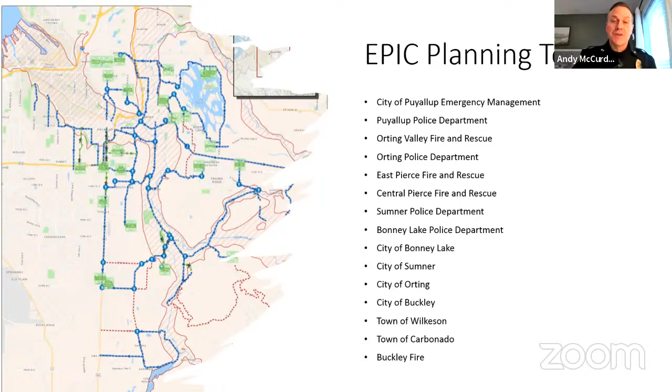So when we talk about emergency management planning, really what we talk about is prevention, mitigation, response, recovery, and preparation. And we look at that emergency management cycle, and it's a continuous cycle.

And as we start to look at what hazards are affecting our community, COVID is an example—that was kind of unanticipated in the specific nature of the threat, but there had been planning in place to deal with a pandemic. But what we learned from that COVID response, when we look at the emergency management cycle, we're going to change a lot of the ways we do things as a result of what we learned during our response.

So we look at this cycle of constant improvement. We're constantly looking at ways to prevent the impacts on local community. We're trying to mitigate the impacts these types of disasters can have. We're constantly looking at how we can prepare the city as well as the community living within our city and working in our city. And part of that has to do with how we plan for government's response and then how we assist the community in recovering after an event.

Now, this emergency management cycle can be for small events, like we have frequent flooding in the Sumner Valley, and we will go through this emergency management cycle in response to even small flooding. But it's also something we would use to prepare for catastrophic events like a lahar from Mount Rainier.

Now, the preparedness part of that cycle, typically what we look at is the planning, organizing equipment in our communities, training, conducting exercises, and then we constantly evaluate to improve how we respond. So this preparedness cycle is constantly going, and as new threats are identified or new tools are purchased, we constantly want to train and plan and exercise how we're going to use those so that during a real event, we're prepared and not caught flat-footed when something actually happens.

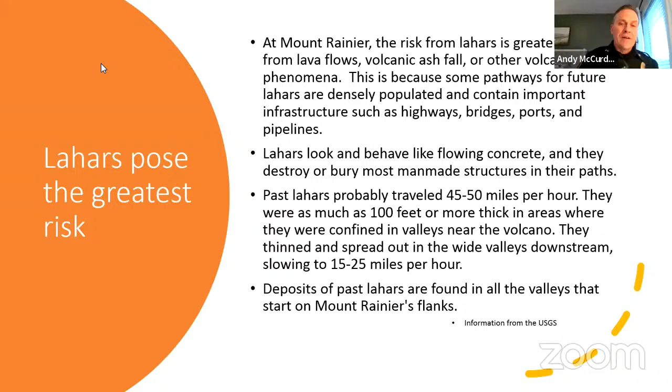One of the things we've done to plan for the eventuality of a Lahar is what we call the East Pierce County Lahar Rapid Action Plan, or RAP. This has been a big body of work accomplished by the EPIC team. Each community has its own unique RAP plan that meets the needs of its own community.

It's designed to give first responders directions so they know what to do to try to mitigate the impacts of the Lahar as it comes through. Typically during this no notice or short notice event, they would refer to that guide, then go to predetermined locations where they would start to direct traffic out of the danger area into safer areas. Typically most of the city of Sumner is going to evacuate into the Bonney Lake area.

Bonney Lake has to be ready to receive us. It's pretty massive if you think about the entire population of Sumner. You have to also consider the businesses and commercial areas, and so on. The light industrial areas in downtown Sumner would all have to evacuate.

I personally have been involved in a major natural disaster back when I was a police explorer down in the Bay Area. I was working during the Loma Prieta earthquake when the bridges collapsed. Just to give you an idea of what it looked like, I was at an intersection in the city of Hayward, a pretty good distance from where the bridges collapsed. I was standing in the middle of that intersection for about 12 hours, and during that time not a single vehicle moved. It was complete gridlock in the whole region.

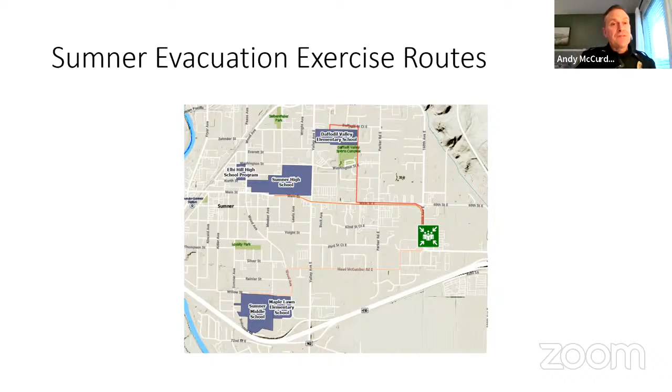As I mentioned before, this whole project is being done by the EPIC team. There's a website for EPIC at www.epiceoc.com, which stands for epicemergencyoperationcenter.com. I'd encourage you to go to the website and take a look. There's a really interesting presentation on there about the cold storage fire in the city of Puyallup last year, with a lot of descriptions of what happened and some photos. It's a great example of the amazing amount of work that gets done during a major catastrophic event like that. I'd encourage you to go check it out.

During a real event, you'll see on that website that there are maps posted, and those maps are kept up to date by our personnel in the Emergency Operations Center.

So as an example, they would be using those maps to show people where it's safe to evacuate to. We also recently purchased something called Code Red, a public notification system similar to PC Alert, but it's something we have a little more local control over. Typically during a major event, somebody in the Emergency Operations Center, police department, or fire department would send a message out through Code Red to notify the public about emergent actions they need to take because of a public safety hazard.

Here's what that looks like. If you go to that EPIC EOC, here's a picture of that map that actually shows the evacuation routes for Lahar. The whole Lahar evacuation route program is coordinated regionally. Each of the first responders needs to know exactly where they need to go.

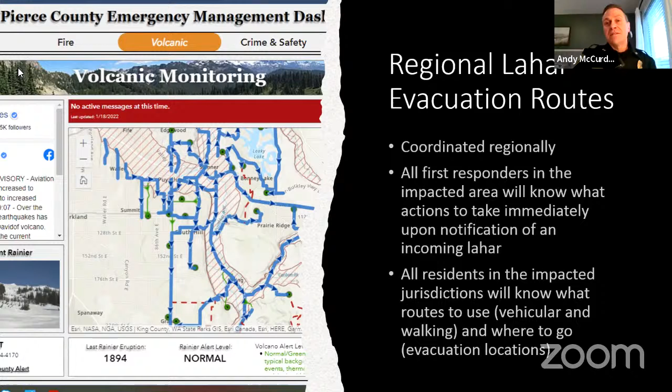So basically, especially in the city of Sumner, all residents are going to be impacted and need to know what routes to use. It's most likely that most people are going to have to evacuate by foot, which means that as a community, we're all going to have to come together to take care of each other, because some people are not going to be able to walk out and are going to need other people to help them do so.

Also on the EPIC EOC website, there's a lot of information about preparation, how to create a disaster plan for yourself or your business, some information about how to plan for your family, and some things you should have for your go bag in case there is an event.

I think the Lahar hazard, even though it's something that's unlikely to occur in our lifetimes, it is still significant enough and is going to happen again at some point. So a little bit of preparation before the real event happens is going to make it a lot less stressful for you and your family.

And that's most of my presentation. As I said, Kirsten's on the call as well. I don't know if she has anything else to add that I missed, or if anybody has any questions.

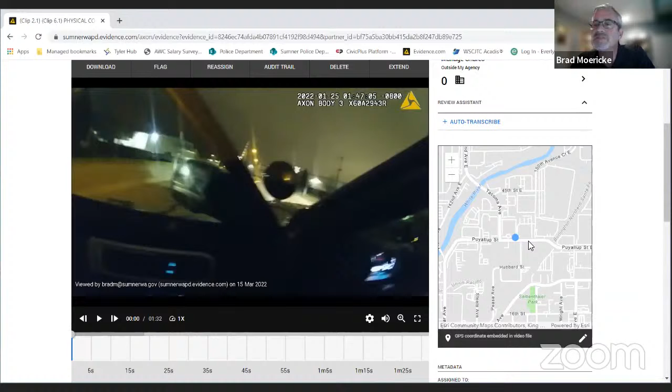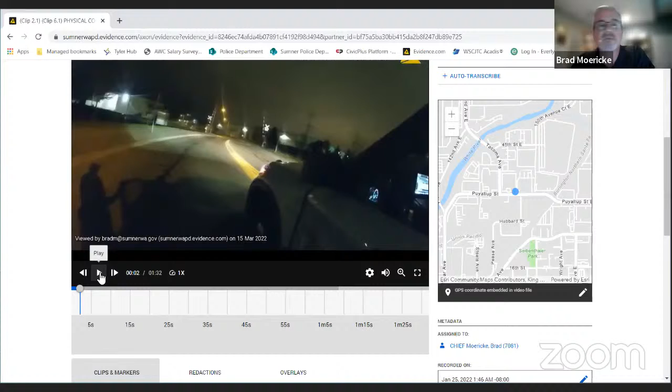And that's why I wanted to share this one with you. It's not redacted, it's an adult, he's not in a private location, and he's been charged with a crime. You'll notice the body-worn cameras are GPS enabled, showing the location of the incident. This was in the middle of the street on Puyallup Street. A motorist called in, a subject apparently passed out behind the wheel. That car in the back is the reporting party, who stayed there till police arrived.

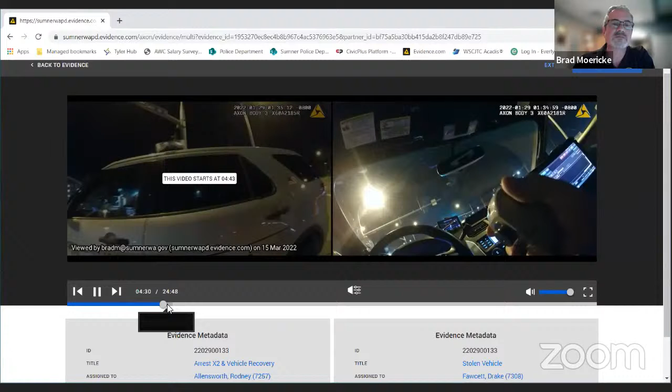Put your hands up, right now! Keep them where I can see them! Kind of went there, it was a challenging one, compliant so far. Very calm, letting dispatch know everything that they're doing. Northbound, south side of the building. And backup's arriving, you want to pull them out on the driver's side?

We got him, Trout. We're gonna start calling him out. We'll call him out on my right side of my car. You wanna hold there? All right, I'm gonna call him back. You ready, boss? Yep, all right.

I don't know what they're doing. We're gonna call him out. Driver, open the door. Take both hands up in the air. You're being audio and video recorded. You're in a stolen vehicle. Step out.

Put the car in park. Face away from me. Keep your hands straight up in the air. Take 4 steps straight up in the air. Take 4 steps to the right. 1, 2, 3, 4. Walk back towards the sound of my voice. Do it now.

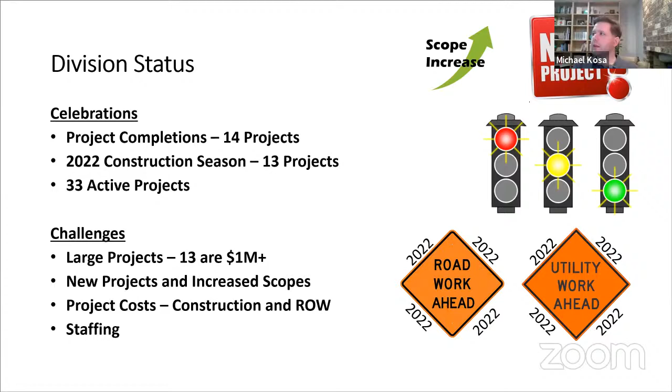So a quick overview of our staffing status. I'm the city engineer, and I have a few projects on this list. But aside from that, we really have just a couple folks that are running these projects.

Andrew Leach is doing transportation and sidewalk focused projects. We had Jason Van Gilder on staff until the end of last year. He left, and he's now a public works director in Idaho. Good luck to him. But we are currently actively looking for a backfill for his position, and that's really a utilities focus, water, sewer, storm focus, everything to do with pipes.

We also wanted to say hello to our new associate city engineer, Alisa Ayala. She started in January, and her focus is that she comes from a construction background. So she's being utilized for a lot of our construction projects coming up, and also special projects. She's worked on facilities before, so she has a varied background that is not solely underground or transportation focused.

And we also have Robert Wright on staff. He's much more environmental and sustainability focused. He works with our NPDES permit, our stormwater permits, and he's also helping on the White River project and some of our storm projects.

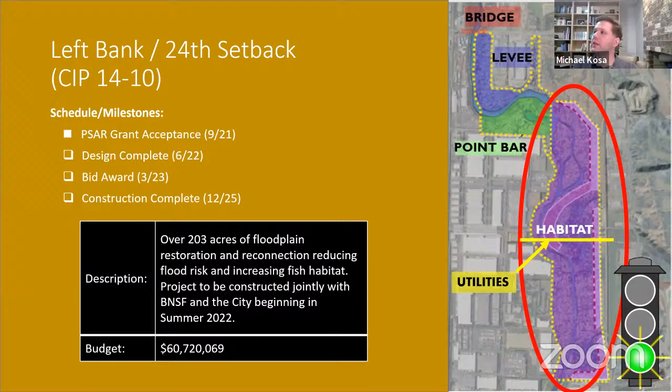And right now we are all systems go on that, just waiting for that Corps permit to get through the process. Feel free to stop me at any time if you have any questions, but I'll just keep rolling.

24th Street utility relocations, that was the yellow line in the middle of the last slide. That's going out to bid this year. It's some water and sewer line relocations, including a sewer pump station, which is what the picture shows. That's being relocated so it's out of the purple area. That's about $4 million, looking to complete that sometime next year.

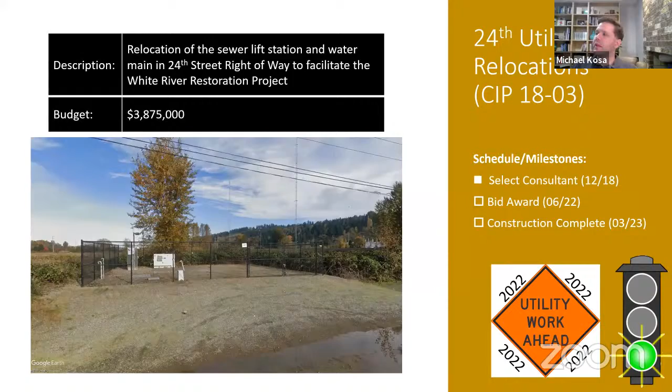That was also a green light. Our other project, the Pacific Point Bar and Stewart setback project, it's a little further out, but it's also in line to be completed. We're looking at property acquisitions right now, and looking at about 2024 to complete those property acquisitions.

It's just a little bit slower than the other project. We have all of the property for that purple area, whereas for this, the blue and the green area, we're still looking to finish our acquisitions, and that's those parcels in red. Once we can get those acquired, then we'll be able to move forward. Really our focus is trying to get that purple area under construction. It'd be a great achievement.

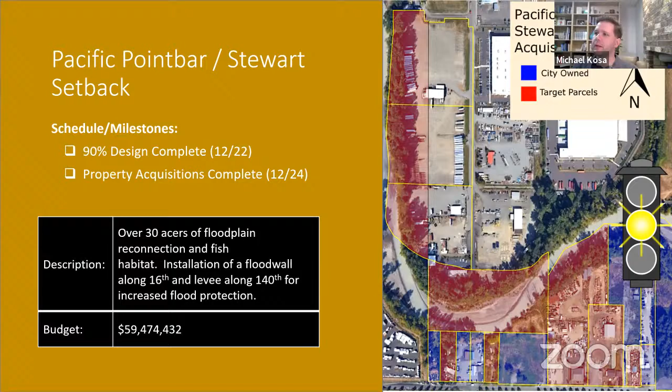And then we also have, at the beginning, the Stewart Road Bridge project, which is currently going through final design.

It expands Stewart Road from the 2-lane bridge that it is today to a 4-lane structure. It also has a shared use path on it. It's the last piece of the corridor between 167 and Lakeland Hills, so everything else is 4-lane except for this one. Unfortunately, it's the most expensive one because it is a bridge.

We've been really focused on acquiring grants for this project. We have about 50% of it funded through grants, but we're still trying to acquire grants for the construction phase. Right now the project is slated to begin in 2023 or 2024, hopefully with some more funding. It's about a 3 to 4 year project because of the work that has to be done in the water, and there are fish windows involved at certain times of the year when you can get in there and do work with minimal disruption to the endangered fish in the river. So that one is currently green light.

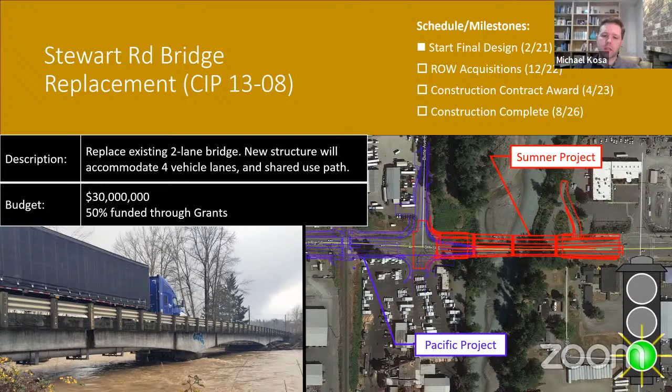The Pacific project is currently going on right now. That's the area in purple. They should be completing that by the end of this year, possibly running into next year a little bit. We'll see how that goes. So that's the White River restoration projects.

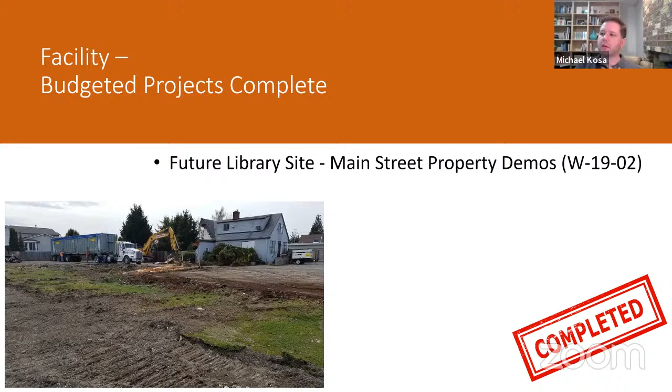Next, I'm going to move to facility projects. The one we have completed was the future library site at the Main Street property, demos of the property that was transferred to the Pierce County library system. We did some work on getting that property demoed. That was one of our projects.

We have the operations facility. This project has been well discussed, and we are almost at a fully completed design. We're looking at completed plans for review. They're very close, within a couple months of having a final design package, but we also have property acquisition issues, so that's slowed us down. We're kind of at that yellow light phase. We also had a scope increase. Originally we hadn't anticipated it to be as large of a project, and it just grew a little bit. So those are some of the headwinds we face as we're looking at these projects, trying to figure out how we're going to complete them.

We've gone back to the drawing board a little bit on this project a couple times—not to the beginning, but retooling things and making sure we get it right, because it's a large amount of funds to spend, and it's our long-term facility.

So, Councilmember Stuart. Yeah, thank you.

Can you put your cursor on the two properties on the north of 29th Street that we're trying to acquire? Yes, those are these right here. And that's two parcels there, is that right? Yes, I believe the Buck parcel is this one on the right, and I believe that is under a purchase and sale agreement now, or about to be. I think the paperwork is in the queue if not. And then the Cabrera parcel is this one here. So the one to the right on that picture, just to the right of that cursor—is that going to stay there? We're not acquiring that? So this here is the Buck parcel, and then there's like a little subdivision of maybe 2 or 3 homes, probably a little short plat. We're not acquiring that; those are going to stay. Okay, great, thank you.

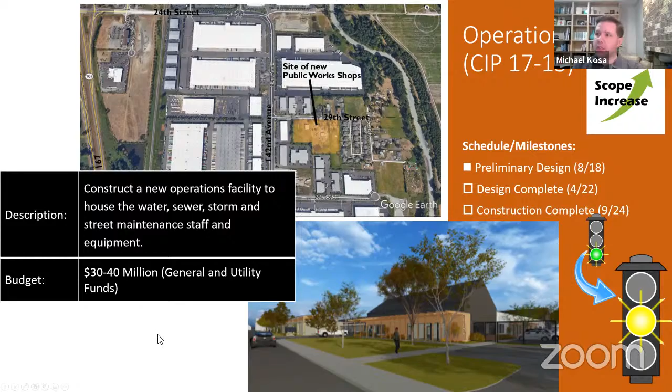That's the operations facility. Next, we're going to talk briefly about Rainier View Covered Court. This project is a new project from the budget process perspective, at least. It's a project we've been looking to get completed for a while, but the funding came in last year, and we are currently in design. The design is slated to be complete at the end of this year, with construction complete in 2023 at Rainier View Park.

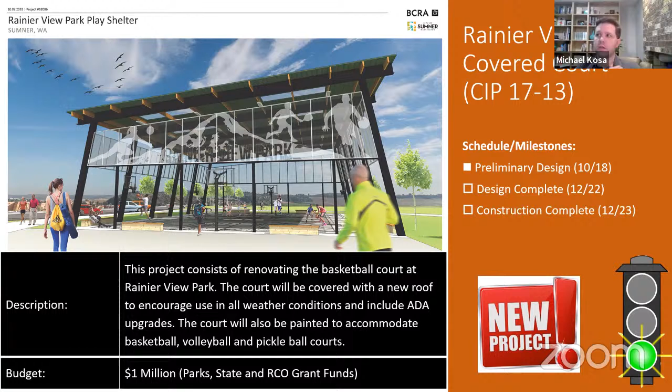Another facility item that we have is the Heritage Park remediation. This part of Heritage Park was a former Texaco site and had some underground storage tanks. You may have heard some of this in one of the committee meetings, but back in the 90s there was some work and investigation done, and then in the early 2010s some more investigation was done. There was some contamination found, but there wasn't really a comprehensive look at that. Now, with the amount of work being programmed at Heritage Park, it's the right time to look at that site and make sure it's cleaned up, and see what sort of actions need to be taken if needed. So we're working through that, and we'll be selecting a consultant to start looking at that work.

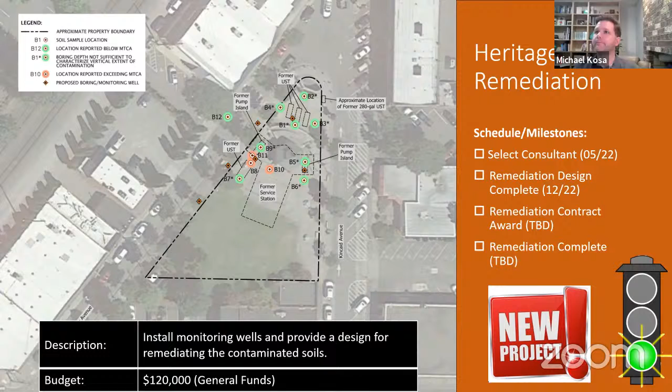And we're on target for that. Next, I was going to launch into roadway projects, and thank you for allowing us to switch up this project presentation and the 6-year TIP presentation. You might see a few of these projects on this presentation, and maybe we'll answer some of your questions for that TIP presentation that Andrew Leach will be giving.

But first off, some completed projects. We've got some big ones: Bridge Street Bridge, 410 Cannery Way Bridge, the 410 Traffic Avenue interchange bridge. We are just finishing up the sidewalk improvements in town. That project is substantially complete, and they're just finishing up the last pay estimates for it. And then we also completed the 142nd Avenue intersection study early last year. So those are some completed projects.

Councilmember: I noticed on the 410 Traffic Avenue interchange that there's damage on the wall, like that railing at the top. Who's responsible for that? Is that the city or is that the state? Staff: We are currently working through that exact question with the state. We've recognized that, and we're trying to determine whose maintenance responsibility that is. We'll figure it out and get it done, but it's a discussion topic.

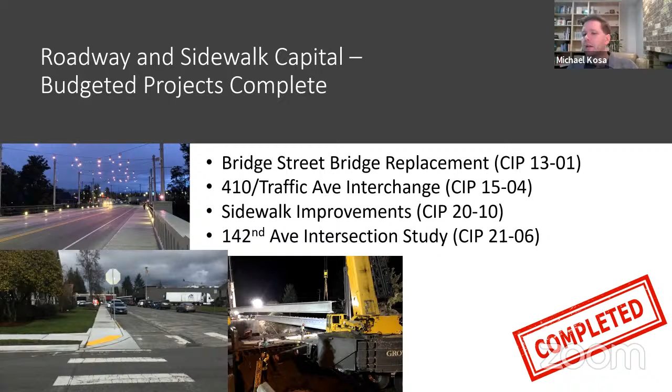Yeah, it's a plant establishment period for most of them. The last thing that happens is the landscaper comes in and plants the plants, and then they have a warranty on those plants. So that extends the length of everything one to two years, which is unfortunate from a paperwork perspective, but good so that we make sure we get what we paid for and don't end up with a bunch of dead plants along the way. So anyway, moving on.

First project we'll be talking about is the Alder and Kincaid Utility Improvements Project. You've seen a lot about this lately. It's out of the Main Street visioning, and really you can see it's the development of the Cherry and Kincaid streets into the Woonerf configuration, as well as the intersection at Main Street. That's the nice picture on the bottom. The really nice picture on the upper left is all of the water lines that we're going to be working on, which is where Public Works gets a lot more excited. We love plazas too, but upgrading water lines is what this project started out as.

And I probably should have had that scope creep icon on here too, because this is one of those projects that just ballooned and ballooned. Before you knew it, it was much larger than when we started. However, we are doing a lot of great things with that. It's a scope increase of all the water line work, and then realizing that if we don't do something with the pavement that we're digging up to put in our water lines—well, this is why we want to make a nice plaza area for the future build-out of Heritage Park and future improvements.

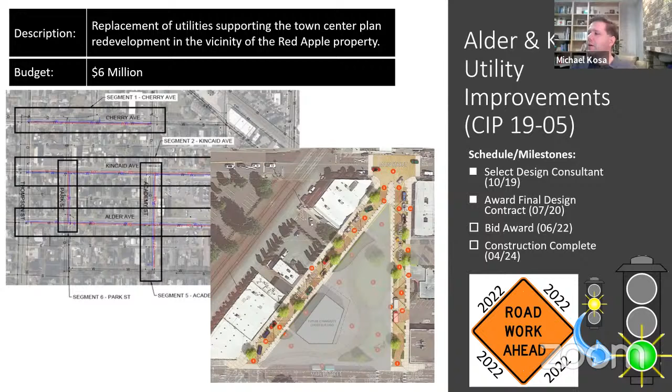It's really exciting that we were able to pair these projects. We can save some funds, and we're looking to put that out to bid next month. So it's a large project coming out. Originally we were a little concerned about how the funding would all come together, but now that's become clear, so we're all systems go on that project.

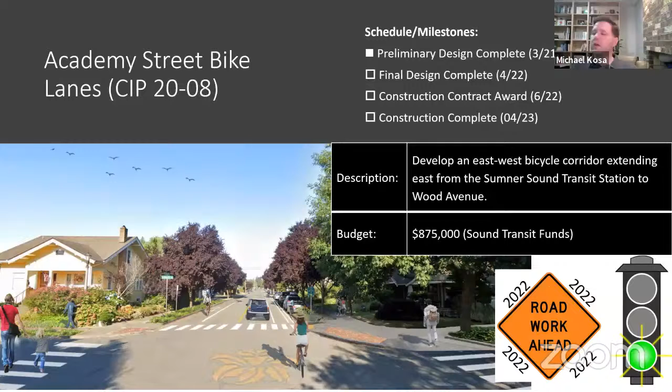Additionally, there's the Academy Street Bike Lanes project. These two projects are actually going to be bid as one bid package, which should be a cost savings and takes care of a lot of overlap between them—water lines on Academy, bike lanes on Academy. It made a lot of sense to have one contractor doing all of that efficiently, restoring the pavement once instead of twice. So, same track, we're planning on having construction contract award in the June timeframe, and likely both projects will be getting going in early July.

Next project is the 166th Avenue East widening. This is our double roundabout out at 166th and Sumner-Tapps Highway at the 410 on and off ramp, also a project you've heard a lot about. Some great news on this project was we received about $1.3 million in federal funds for the final design. We're working through that final design right now, which slowed things down a bit to get all the federal funding paperwork in order.

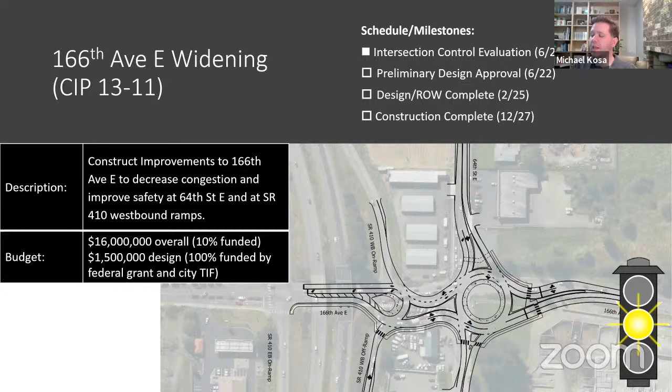The good news is it's a project that's going to take a little while. We have that culvert underneath the intersection—that's a fish-bearing stream at Salmon Creek—and we're in the preliminary design for that large culvert, which is going to replace a 36-inch pipe with a 20-foot wide culvert. There's a lot of interested players, a lot of regulation and permitting involved. But that's the only reason it's slow—it's getting through the environmental permitting process.

Next up is our Main Street and Wood Avenue intersection improvements. This one is planned to go to construction this year—probably looking at complete construction in '22, but it will likely be spring of '23. I have it marked yellow only because there are still a few property acquisition question marks out there, which is one reason it's probably going to slip into that timeframe. It's always challenging to get all of your right of way secured. Additionally, we keep looking for additional funding, federal funds that could help. While we've budgeted for the entirety of the project, we're always looking for ways to fund projects without using as many city dollars, so we'll continue to do that.

This is an older graphic—it's changed and morphed a little bit since then. But the parking is actually replacing parking that exists today out there at the Dairy Freeze and the bike shop. All of that parking is going to be replaced with the parking you see here, which is why it looks like there's so much parking. Actually there are fewer spots than before—some spots are really close to the intersection right now and can't remain where they are. So we found every possible legal parking spot we could get in here to try to accommodate the neighboring businesses, and that's part of why the acquisition was needed—to get this parking in.

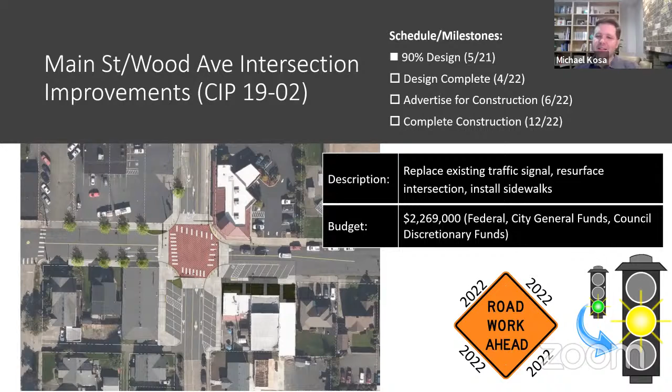Another project that's almost made the completed list is the Sumner-Tapps Highway Guardrail Upgrade and Repaving project. I have the picture on the cover of the repaved area, but we've been working on a guardrail project on Sumner-Tapps Highway funded by federal funds, and that's wrapping up in the next two weeks or so. Peterson Brothers was our contractor for that and has been working on it diligently, and is almost done with replacing all that guardrail—a great safety upgrade to the road utilizing federal funds.

Councilmember Cole said: Yes, so I'm curious—we did get an email about the slow traffic there.

Is it because of the construction of the guardrails? So it's not, and it's been an issue that has kind of been consistent after we did the repaving project.

During the repaving project, we reconfigured Sumner-Tapps Highway. Originally it was a 3-lane roadway section, a hill climb lane, with 2 lanes going up the hill and 1 lane going down. When we looked at the repaving of that roadway, since we were repaving the whole thing, it was really the time to look at striping and how we've striped the lanes out there, and also safety.

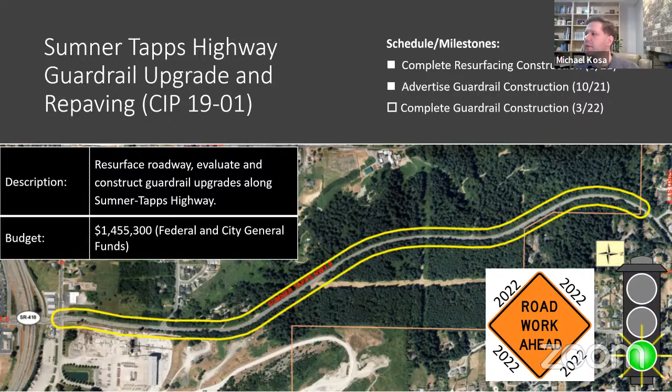Great, thank you. And that'll be completed in the next, like I said, 2 to 4 weeks probably. We'll start getting into substantial completion and punch list items.

Next up is our 160th Retrofit and Pervious Sidewalks. This is the sidewalk between Main Street and the YMCA on 160th. This project has been a slow project. We've had funding through the Department of Ecology for this project, which was great, but we've had to meet all of their requirements, and it's been a bit onerous to get through the process. So it slowed us down quite a bit in getting this sidewalk in.

However, it's out to bid right now, so we're really excited that that's off and will be constructed over the summer. So that is back to a green light project.

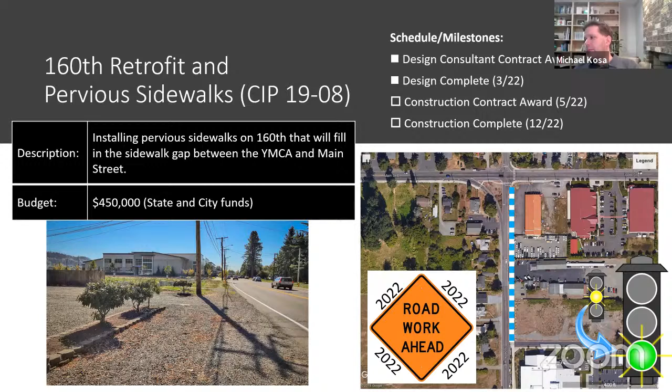Next up is our Rivergrove pedestrian bridge. We have been looking at this. We have funding from Sound Transit for the design of this project, and this has been advancing. We've done our preliminary design, and that's been reviewed and is being approved by WashDOT now to move into final design.

That's kind of slowed down the process, as well as more geotechnical boring data that we would like to get, and that takes a while, and trying to figure out the funding picture, how we accomplish all of the drilling that needs to happen. So it's a little bit delayed, but still generally on track. We don't have any funding for the actual construction of the project.

Councilmember Cole: And so I'm wondering, because you don't have funding, I see that it does have a yellow light, but does that mean that the schedule that you have laid out here is still sort of a viable schedule? It's a viable schedule, presuming that funding shows up.

Okay. And a lot of times when we are completing projects, we are advancing projects through design, and sometimes we get funding from federal sources. Some of these sources that we are able to apply for grants for are accepting applications a couple years out. For example, we're about to start applying for grants through our federal STP program, and there are 2025 and 2026 cycles.

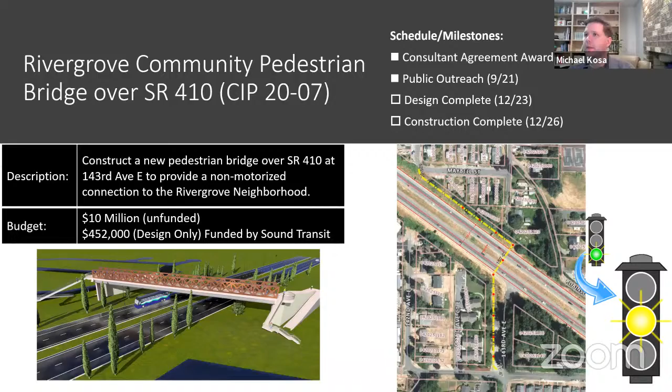Next up is Fryar Avenue Trail. This project is currently in design and in environmental permitting. It's a little touchy from an environmental permitting perspective because it's right along the White River, so it becomes a little more of an issue, but shouldn't be too much of an environmental issue. We're working through it right now.

We also have funding for the right-of-way phase, some strip acquisitions, and then I think one property purchase for this Fryar Avenue Trail. They'll be going underneath the Cannery Way Bridge ultimately, but those funds will be coming open in 2023, so that's why this one's slated for then. But the project will continue moving forward, and we're looking at trying to acquire more funding for construction for the project. We're thinking that would probably be 2025 if we were able to get some grant funding. We'll be applying for it, and fingers crossed.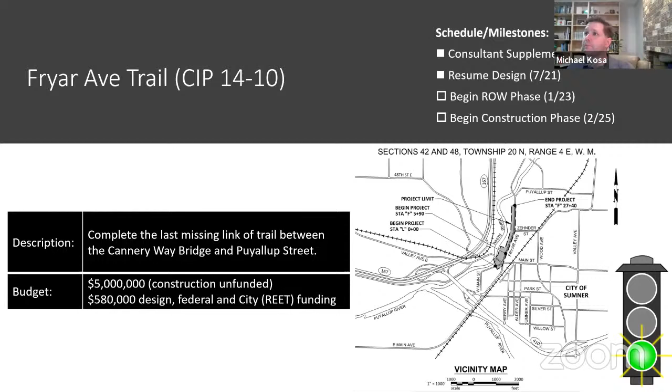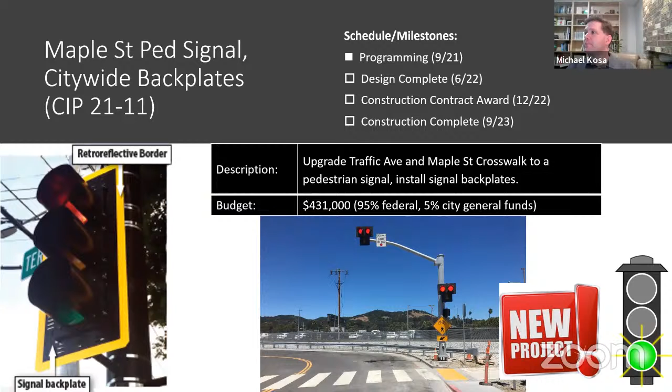Pretty quick design, but looking at getting it completed next year. We also, as part of that project, will be looking at our signal backplates throughout the city, shown on the left. Each traffic signal head has a backplate and a retroreflective border around it - some do have them, some don't. But they really are of a safety benefit to have that border, especially if we have a power outage and a signal is completely out and dark, whether it's a car crash that hit the traffic controller or whatever. If it's dark, people miss that it's even a signal there, especially at night. So these retroreflective borders really help in those instances, as well as draw more attention to traffic signals in general. So that project's on schedule for next year.

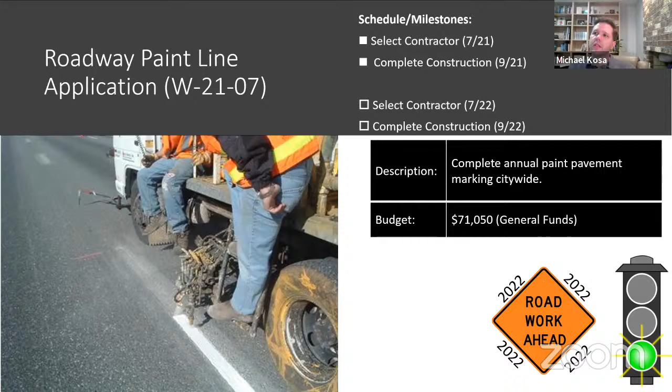Construction - now we get into some of our roadway preservation projects. These are in the budget, but I'll just go through them quickly as a list. Yearly we do a new paint line application for our Sumner roads. That one is scheduled for this summer, usually July, August timeframe. We'll also be looking at a crack seal project.

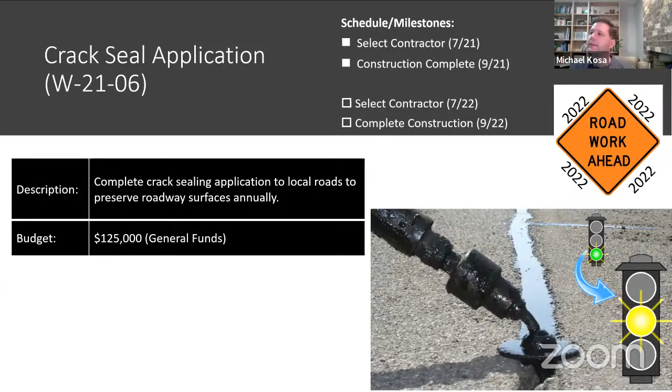It's been a little bit slowed this year, which is why we had the yellow light, but that's primarily just trying to, with all the different projects we have going, really wanting to make sure we get those big projects out and bid in the next couple of months so we can get started on them as well. So this one's lagging a little bit because of that, but still scheduled for July.

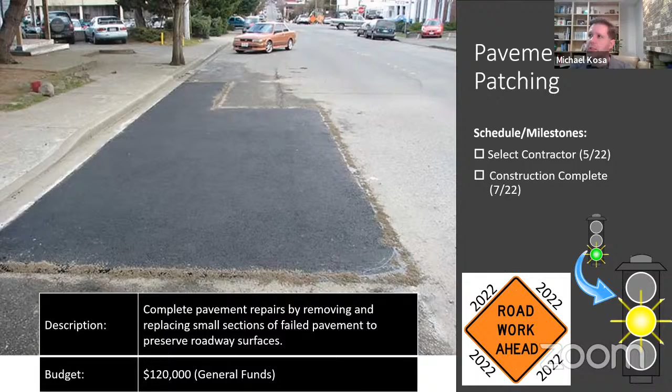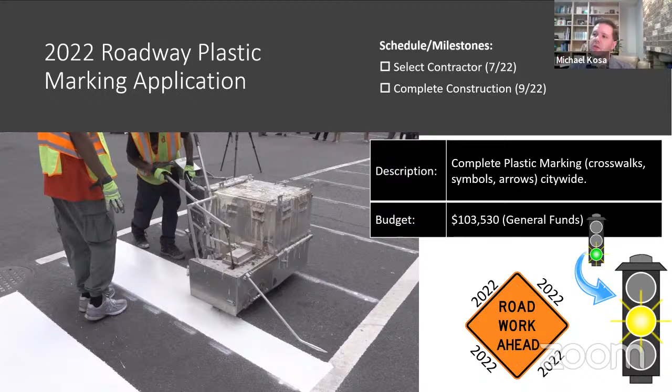And then another traffic maintenance item is our plastic markings, our crosswalks. We have a program to complete all of those, to complete a cycle of those, we replace them every 7 years. So every 2 years we have a project that goes out and completes another portion of the city.

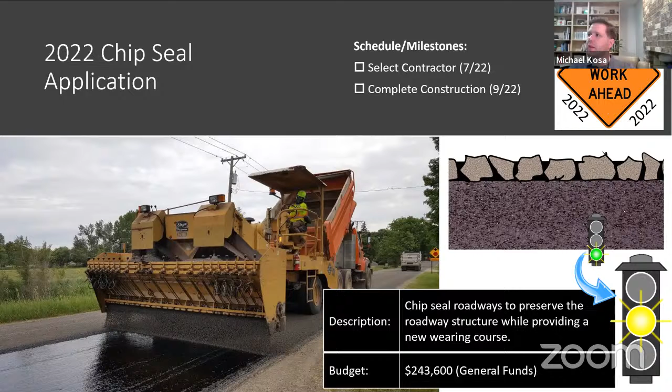This is the existing roadway surface. They put the little rocks on and they stick down, and then they come back and coat those rocks to make sure that they don't pop up. First couple days, we usually get complaints about rocks popping up, sometimes that's before they put that final coat of oil on top of it. This is also in line to get completed this summer.

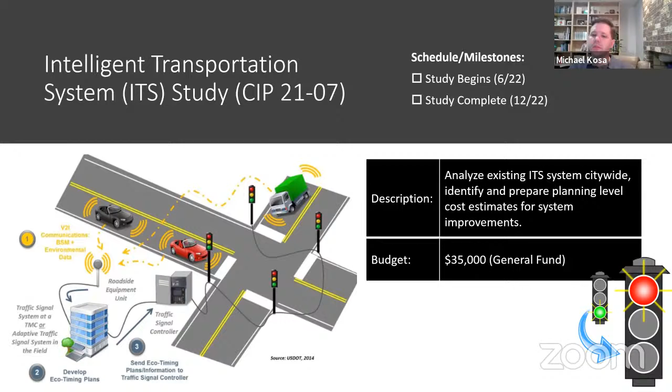One of our projects that we've kind of paused on was our ITS study. I know we've done a fiber study in the city recently, but we haven't done a specific study for traffic signals, and that's in the budget. It's just been really difficult to balance everything, and with the staffing issues we've had, it's a challenge to start this when we know it's a little more optional than many of the other tasks we have.

Next, water projects. One thing that's a little misleading, I talk about water, sewer, and storm projects. Some of those projects we've already talked about involve a lot of funding from water, sewer, and storm. That Woonerf project that we're building a plaza on has somewhere around over $3 million of water funds in it. It has some sewer funds in and quite a bit of storm funds as well, upwards of $1 million.

So these are more specific water, sewer, storm projects coming up, but a lot of the funds are used in that project, in the White River project. That utilities project running underneath the White River project was about $3.8 million, and that's water and sewer funds. So it's not specific to one place, it runs into a lot of different locations, but these are the more water specific ones, and you'll see some of the impacts of not having our staffing in this.

We've had a few projects that we've got on hold until we get through the big push of getting our other construction projects out for the year. We did complete 3 projects in the water utility, including our Viewpoint booster pump station - that's emergency power there, you can see that lower picture. We also completed our south tank drain line repair; this was our drain line that burnt in the fire and was replaced. And then we also completed a large water main project on Hubbard Street that is adjacent to the Duke Realty site, the new warehouse at Tacoma and Puyallup Avenue.

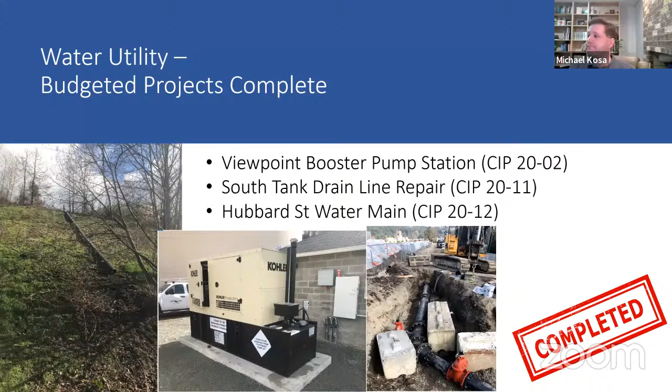A couple of these projects that we're looking at, one is our South Tank Seismic Retrofit. That's essentially switching out some of our valves on the South Tank to incorporate seismic valves that will resist seismic activity in the event of an earthquake. The budget there was 2.4, but that'll come down because originally we were talking about having to bolt the entire tank down. After doing an engineering study on it, it was determined that we don't need to do all of the bolt down procedure, so that'll bring the cost of that project down, and also just the scope in general. We'll also end up painting the tank as part of that project.

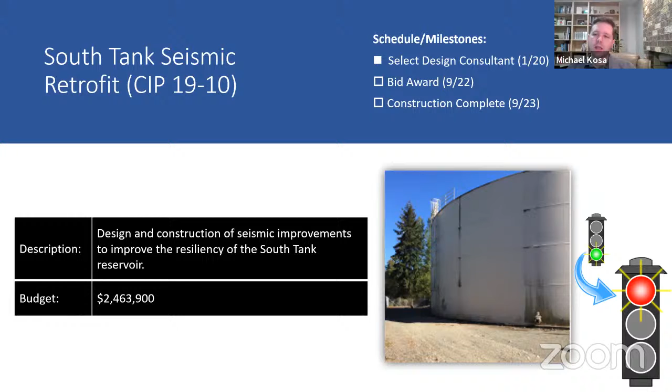Another project we're looking at is the Sumner tank recoating, which is recoating the Sumner Springs Reservoir. But that one we've kind of put on hold while trying to get all the rest of these projects out, with only myself and two other project managers trying to juggle all the priorities.

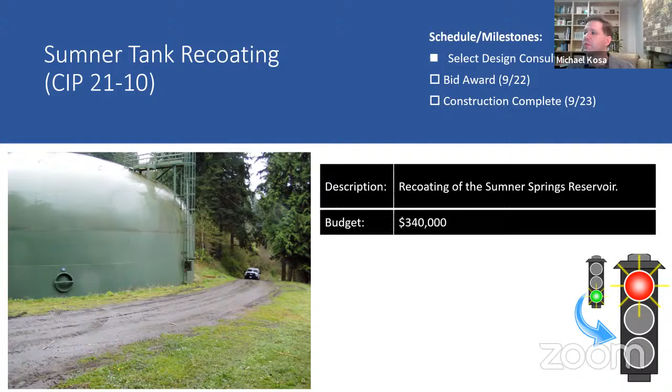Sewer: three projects completed, including a hatch replacement out at lift station 11 on 16th Street. It was really rough out there, and we needed to repave, and it turned out great. If you ever go back there, it looks awesome and it's a great smooth ride. So thumbs up to that project.

We also installed some gate automation at our treatment facility, so we now have a gated treatment facility. Before, they opened the gates in the morning and it was free for anyone to drive in. Now we have automated gates, and the place always has closed gates, so you have to swipe your way in—a much more secure facility.

We also completed the biosolids dewatering improvements. That's that blue thing, a centrifuge that removes water from our solids as they go through the treatment process. So exciting to have those projects done.

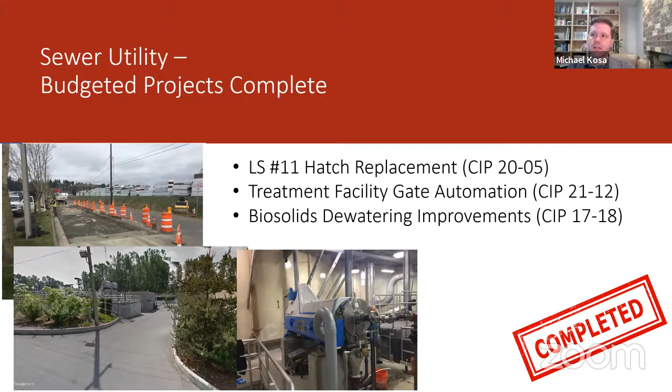One of our bigger projects is our dryer repair and replacement. You probably heard about that. Originally we were trying to figure out how to move forward, but now we're working with a contractor to get the current one repaired, as well as a study to begin discussing how we're going to long-term replace this piece of equipment, which is reaching end of life and is 1.5 stories tall. It doesn't look that big in the picture, but the building's basically built around it—quite a piece of equipment just to dry the solids coming out of our treatment facility.

That will start this year—both the study, which is already going, and we're under contract, or about to get under contract, for the short-term repair.

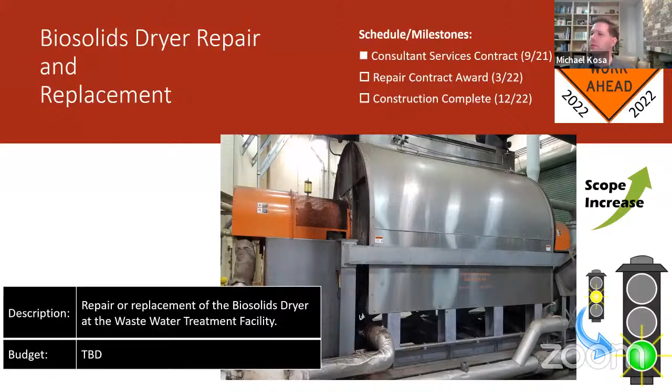Another project is our Auto Lane sewer force main replacement project, out at Auto Lane and 166th, doing some cleanup work for some of our habitual maintenance issues at that location. That one slowed down because we have all those other projects going, but we still hope to get it out this summer. It's potentially our bubble project among the 13 projects we're trying to put out to bid.

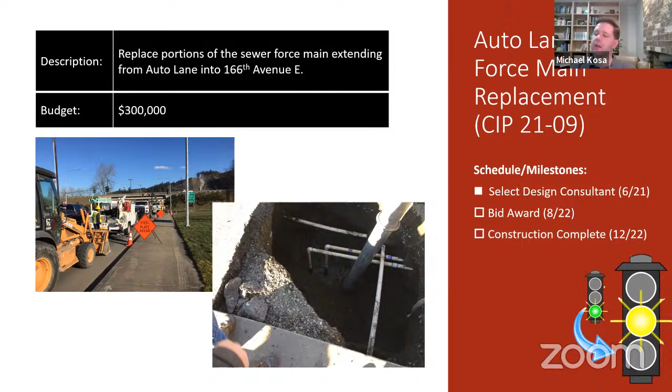Another project is our aeration control upgrade, working with Puget Sound Energy to add sensors and reprogram our blower operation to increase efficiency at the wastewater treatment facility. It ends up being a cost savings—PSE pays for part of our infrastructure upgrade, and we end up with a lower power bill than when we started. It's yellow just because it takes a while to get these things coordinated; the actual work isn't much, it's all about getting to the work. So it's exciting to move forward.

We've already put some energy efficiency projects into place, and our power bill's gone down 12% from 2020 to 2021—a lot of great savings there.

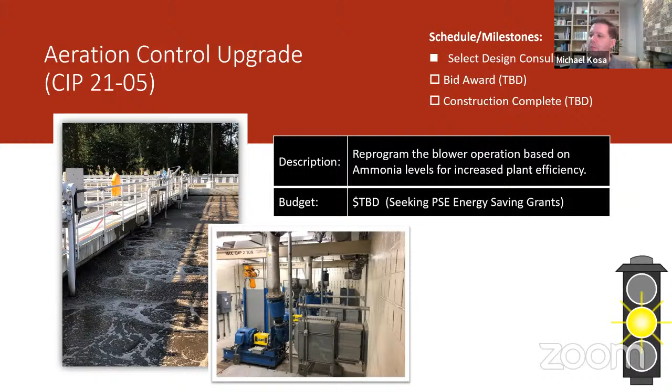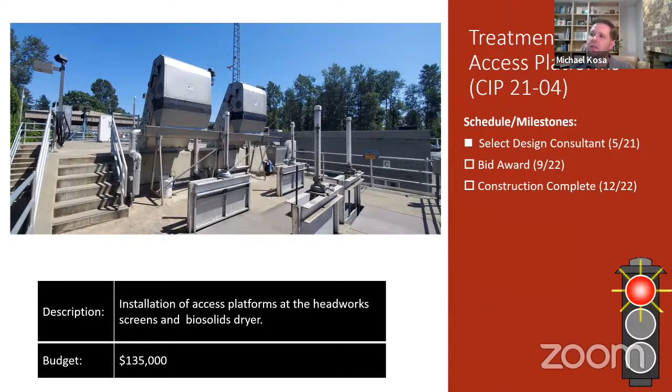Another project is our treatment access platforms, looking at building a platform to allow better access to the headworks screens. This is the first place wastewater enters the treatment plant, where the first cut of things comes out of the waste stream, so things get stuck in there and need to be cleaned out. This is about providing a safer access platform for our crews to do that work. We'll get that one out to bid as soon as the large construction wave subsides.

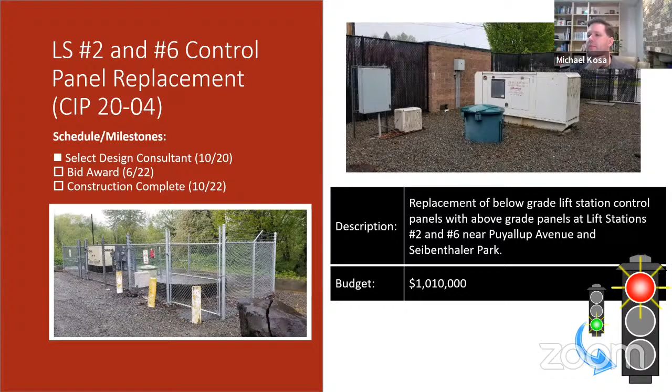Also, at lift stations 2 and 6, we're replacing the control panels there. Same situation—they're trying to get that one out to bid as soon as possible.

Storm projects: we've completed the decant facility paving, which was pavement we needed to add around our decant facility so we weren't driving on gravel.

We also had the 160th storm improvements, at 160th and Elm. There was that pretty gnarly ditch where a truck overturned, and now that whole area has been reworked—there's a pipe under there that replaced the ditch, making for a much nicer roadside safety situation without that really deep ditch.

We also completed our East Sumner neighborhood stormwater ponds. That project has been around for a long time, but there was a 2-year plant establishment period, so we finished that up a couple months ago, and we're really excited to have that one off the books too.

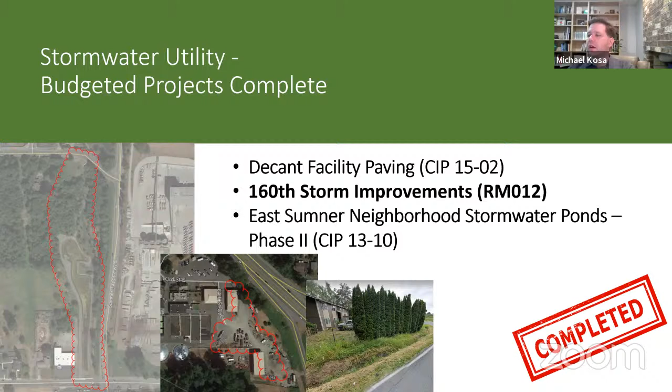One of our upcoming projects is the Salmon Creek Channel realignment. In the East Sumner neighborhood project, we built a brand new channel but hadn't activated it yet, waiting for plants to establish. We had a big sheet pile wall blocking that new channel off, so fish and the creek didn't go that way. We'll be removing the sheet pile and reconfiguring Salmon Creek to run in the new channel we built, instead of the roadside ditch along Sumner-Tapps Highway, which wasn't as hospitable an environment for that fish-bearing creek.

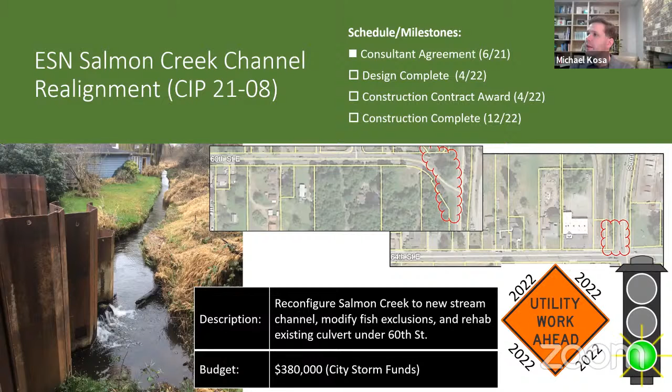That project is slated for this summer and will be completed. It's got a fish window requirement as well, so we're excited to get that off the books later this year.

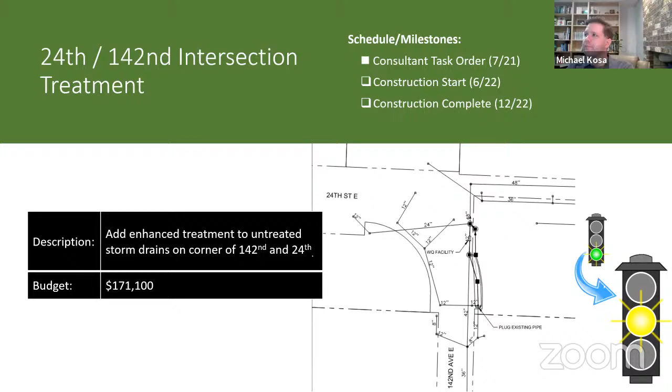Other projects we have include the 24th and 142nd Avenue intersection treatment. It's a project to provide a water quality facility there that for some reason never got installed. We identified that as a need and are working through it, though it's a little slow because of our other projects.

The other one, similarly, is a new trunk line relocation at 63rd Street Court East, reconfiguring the condition up there because there's a pipe that runs underneath a home. It would be better served to route it down through 63rd Street Court East and connect to a main in Parker. So we're looking at doing that work, as a second priority.

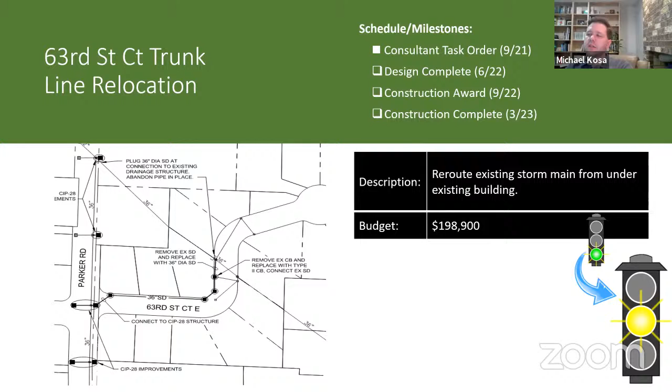Finally, Salmon Creek culvert replacements. We've been looking at getting design done for a number of culverts along Salmon Creek, which are obstructions to fish. Some are on public property, some on private property, but we're getting designs put together so that when the situation is right, we can upgrade the culverts to something fish passable.

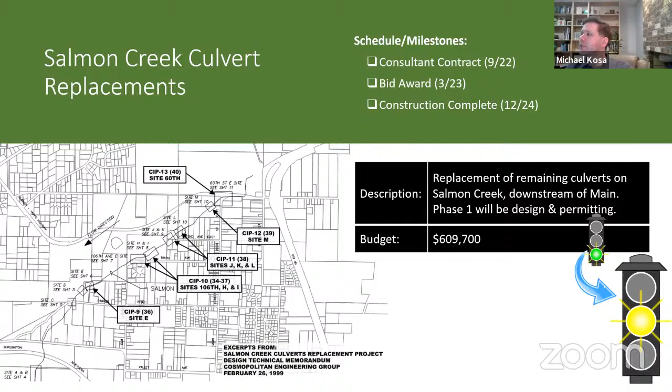So that's a lot of projects. I wonder what you guys do in your spare time. Yeah, that's a good question, isn't it? Do we have any other questions for Mr. Kosa on this? Seeing none. Thank you, that was great.

Now we're going to move on to the 6-year transportation improvement program, and that would be Andrew. Good evening everybody, just hang in there a little bit longer and we'll get through this item too.

A lot of these projects on this list were just covered by Michael. It is that time again for doing our annual update to our 6-year transportation improvement program, also called the TIP for short. This is looking at 2023 through 2028. Just some background on the TIP: per a couple of RCWs, the city is required to do an annual update to our program, which is then filed with the State Department of Transportation, so we have to do it each year. This 6-year TIP establishes and prioritizes our street, sidewalk, and trail projects looking out the next six years.

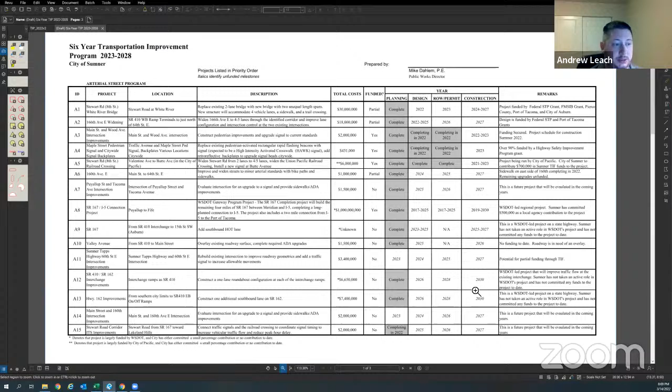A12 is the State Route 410 and State Route 162 interchange improvements. This is another WSDOT-led project. That's the interchange down here on the map. This project was also part of the state transportation package, and it was approved as part of that package. It's basically waiting for the governor to sign off, and then WSDOT will move forward with it. This project will consist of redoing the intersections, or the interchange intersections, on either side of 410 on those on and off ramps.

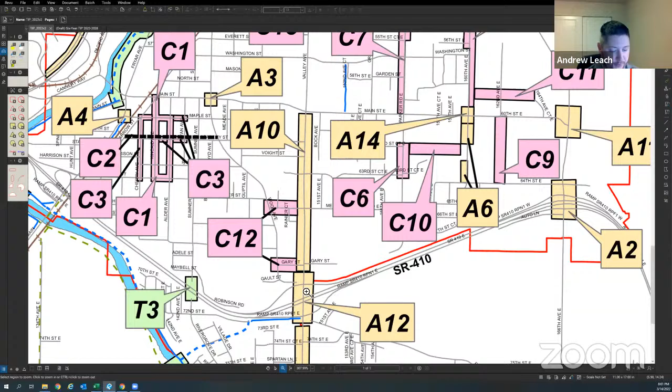A13 is another WSDOT-led project, their Highway 162 improvements. That's down on the south side, just south of where we were, looking at widening that roadway out. This has been identified in several of WSDOT's planning studies, but the improvements for this section are way out, probably looking at the 2030 timeframe, and for the most part beyond the scope of our current 6-year TIP, but we'll keep it on there because someday it's coming.

A14 is our Main Street and 160th intersection improvements. We recently upgraded this intersection to a 4-way stop, but as more development occurs and more traffic comes through, we'll be looking at upgrading this intersection to include sidewalks. Not every corner has curb ramps right now, so we're just looking at improving it and making it more ADA accessible and safe. This project will be evaluated in the next upcoming years.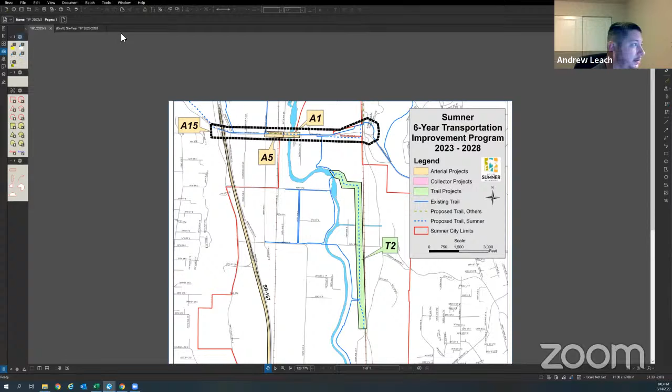A15 is the Stewart Road corridor ITS improvements. This is up here on the north side of town, this dashed black line. This would be looking at all our signalized intersections up and down this corridor, coordinating them so traffic can move through more smoothly and efficiently, especially with more development occurring up in the north end of town as well as the Lakeland Hills area up in Auburn. That's a future project we're looking at, but it's currently unfunded.

These are our collector street programs on our smaller roadways. I won't go through every single one of these, but just some quick highlights.

A few new projects were added. C1 and C3 were added this year - this is our Alder and Kincaid utility improvements project, broken into two phases, phase 1 and phase 2. You might ask why we're just now adding this to the improvement program. Well, originally it was just a small waterline replacement program that's now grown into roadway improvements, sidewalk improvements, and adding curb bulbs. Phase 1 will also include our Heritage Park Woonerf construction around Cherry Avenue and Kincaid on either side of the park, turning that into more of a plaza. We're really close to getting the phase 1 project out to bid, hopefully in the next couple months, probably towards the end of April, and then starting construction later on.

Project C2, Academy Street bike lanes, will be included as part of C1 since it's under the same construction package, just because they intertwine in similar areas. Rather than rip up brand new pavement for one project and come through and rip it all out on another project, we're doing it all at once. So like I said, that phase 1 project ballooned into a much bigger project.

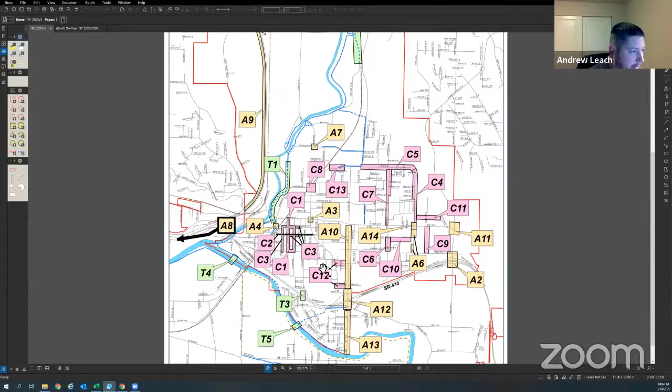Down at the bottom, C12 and C13, these are new this year as well. C12 is looking at filling in the sidewalk gaps on Gary Street and Meade McCumber, in between Wood and Valley Avenue on both streets. We've gotten a lot of comments recently, as these gaps are so close to the schools.

We did apply for a TIB grant last year to fill in these sidewalk gaps, but we were not selected, unfortunately. So we'll add them to the list and look for future funding to get these gaps filled in.

This is a similar story with C13, the Elm Street sidewalk improvements. This is extending some sidewalks.

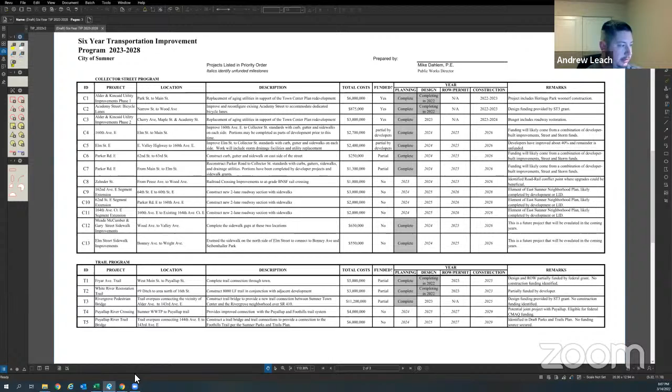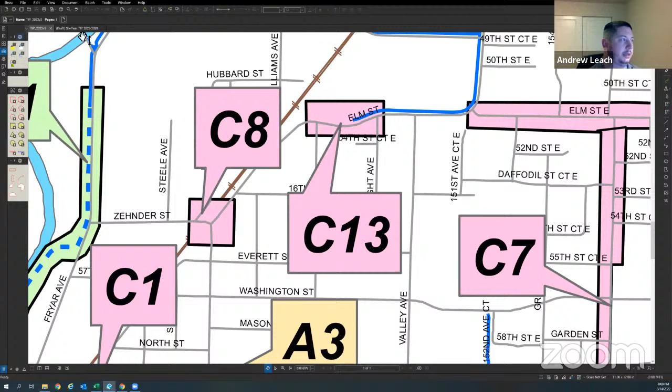Trail programs are the T projects. These were all no new projects added here. A couple of these we touched on already: Fryar Avenue Trail, Rivergrove Ped Bridge, the White River Restoration Project. T2 will include relocation of the Sumner Links Trail. And then a couple of these others, Puyallup River Crossing and the Puyallup River Trail Bridge, are identified projects in our Parks and Trails plan, but more planning and funding need to be identified.

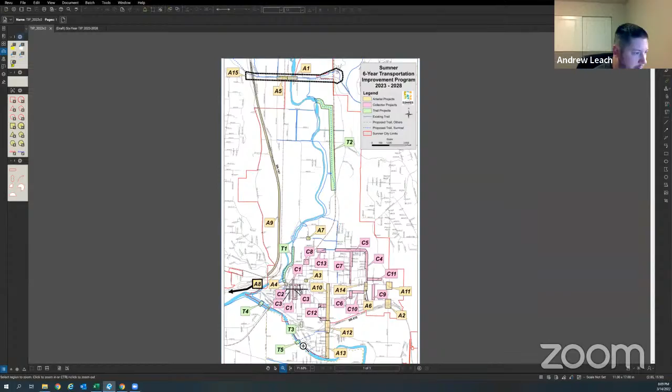There are currently none there. I can pull them up on the map though, just to show where they're at.

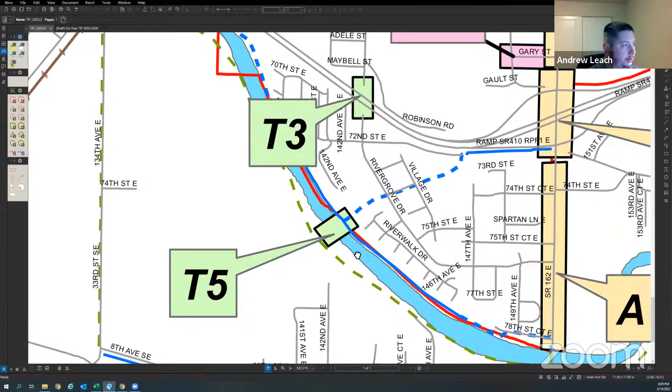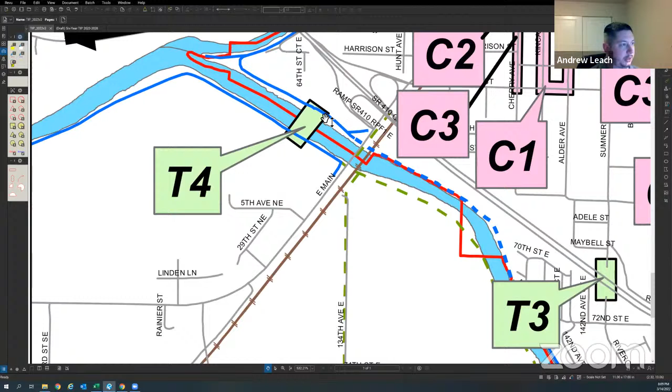T5, that is Puyallup River Trail Bridge, connecting from the Rivergrove neighborhood across the river - that's kind of where the Williams pipeline open area is. And then T4 is providing a crossing here and connecting to Puyallup's Riverwalk Trail on the south side of the river to our trail on the north side. So those are where those two are located.

And then the last page, the R's are just our annual street maintenance programs that Michael touched on, that we'll be tackling a lot of these this summer when we have warmer and drier weather. That just makes it a lot smoother and easier to do, like our paint line application, our thermoplastic, and then our crack seal, chip seal jobs, and pavement repairs. So a lot of those will be underway here in a couple months.

And then down this table at the bottom is just a few projects that we'll be completing here in 2022, which I think most we've touched on in Michael's presentation: the Guardrail project on Sumner-Tapps Highway, the 160th sidewalks, filling in the sidewalk gap next to the YMCA, and then the ITS strategic plan, where we're looking at integrating our existing signals.

The last one here is the current sidewalk project that's just wrapping up right now, which was funded mostly by Sound Transit grants. That's almost wrapped up - we're just waiting for some better weather. We've got a couple of crosswalks and stop bars to redo and replace with thermoplastic.

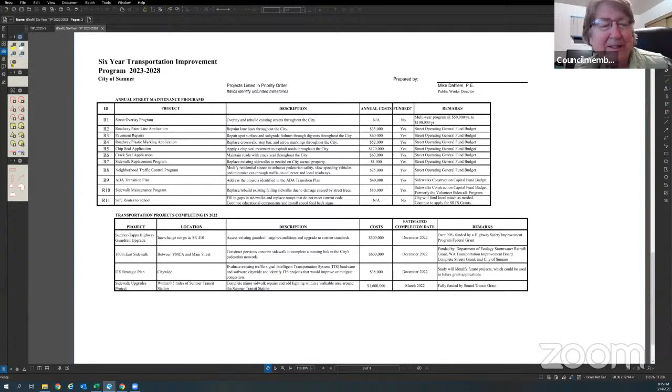Councilmember Botetto, Sound Transit will be coming to council in the next month or so to give an update on where they're at with the garage. They're about ready to release the RFQ to do a design-build process, so that is not our project at all. Yeah, I know, it's definitely a Sound Transit project. Well, I just thought since some of these other things did mention Sound Transit, that's why I was asking. But it's good to know they'll be making a report to the council.

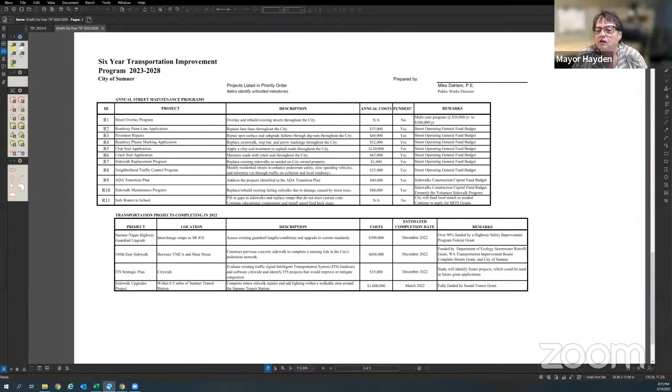Councilmember Brown. Andrew, C9. Yes. C9.

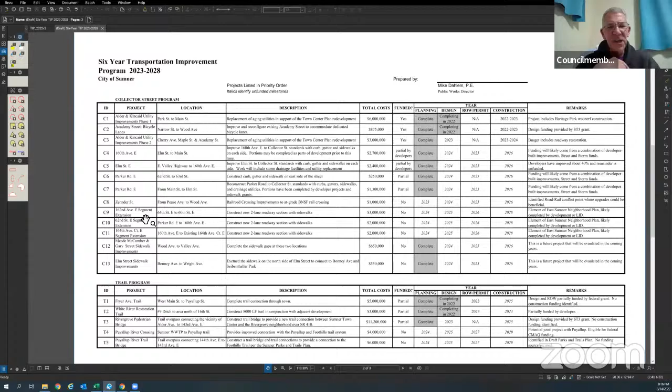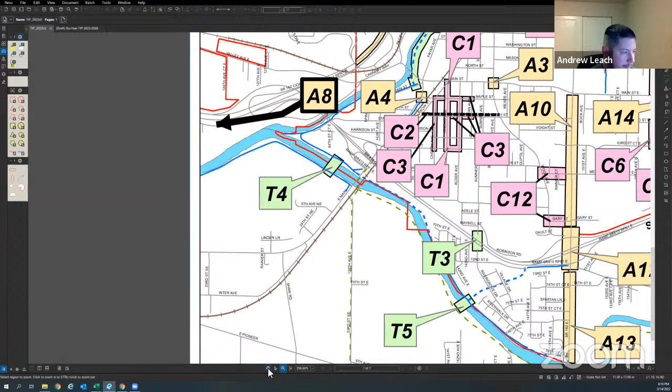So they're going to make a road between the YMCA and Tapps Highway? I think that's a good question. I know there was a wetland back there. Let me scroll out here. So C9 is looking going north-south, I was getting mixed up. There was originally plans to go east-west to make another connection here, but I think that road project idea was removed, especially with the YMCA's playfields going in.

C9 is a roadway project identified as part of our East Sumner neighborhood plan. I believe there are wetlands going through here. The idea was installing or having that road constructed with development moving forward. So right now it's not a funded project, just in a planning phase, identified as a wanted connection to improve our road network.

All right, so if they did do that, they would have to mitigate the wetlands, is that right? Oh, yes, for sure. All right, yeah, thank you. Do we have any other questions?

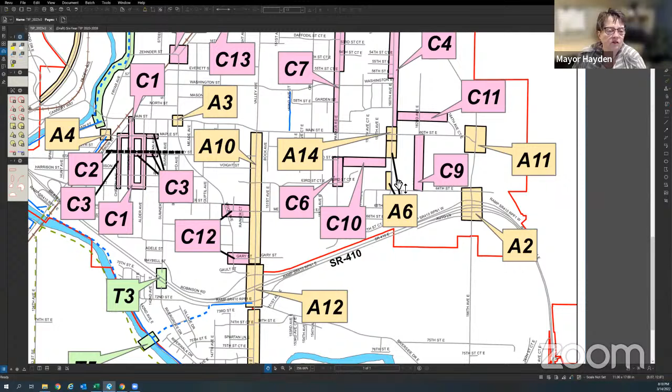Well, Public Works has been busy, no doubt about that. Mr. Wilson, do you have anything before we adjourn? No, Mayor. All right, now that you're all worn out from all those road projects, I'm going to adjourn this meeting.